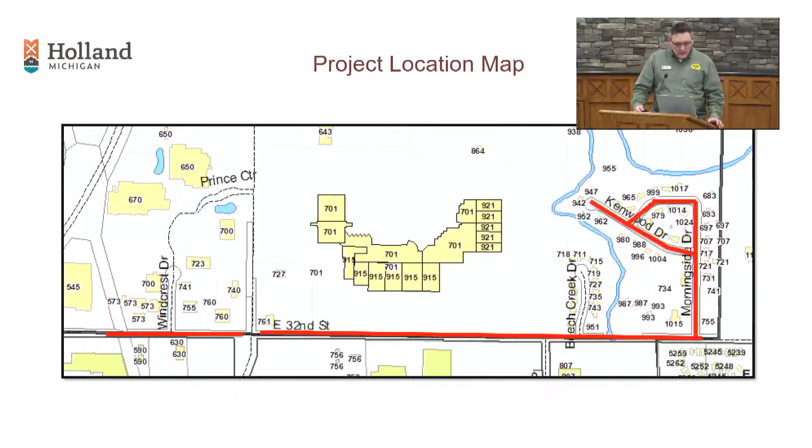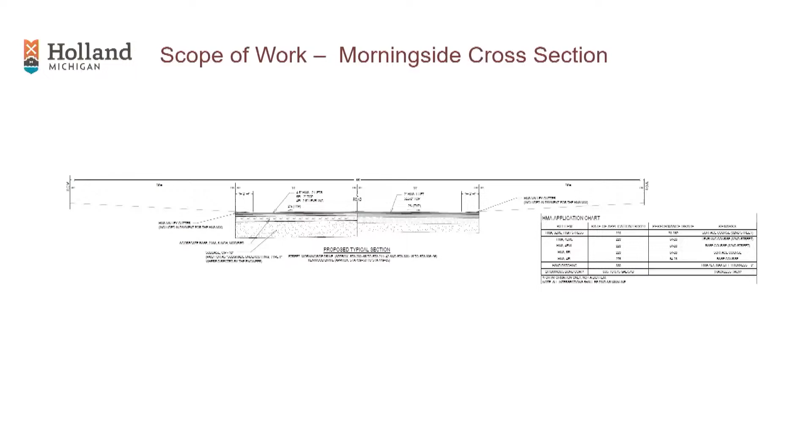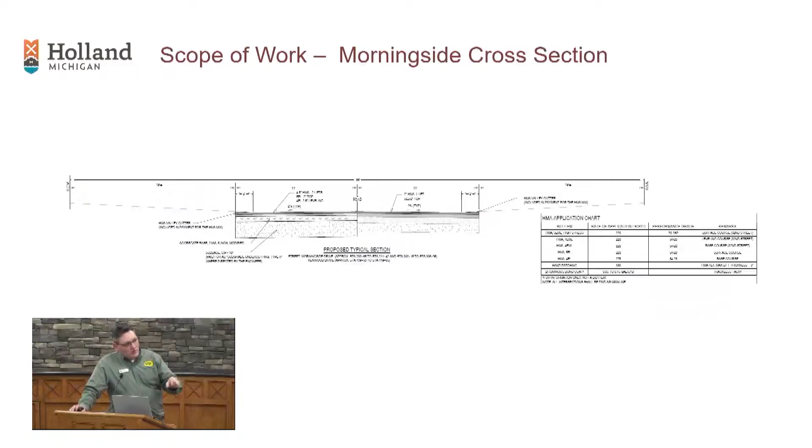So in Morningside and Kenwood neighborhood, what we're planning on doing is we will completely remove all the pavement on one side of the road, place the water main, get it tested, get folks connected to it, and then start rebuilding the pavement. That will include a new base coat and substrate on one side, and then we'll mill what's remaining on the other side and give it a complete new top coat of pavement as we leave.

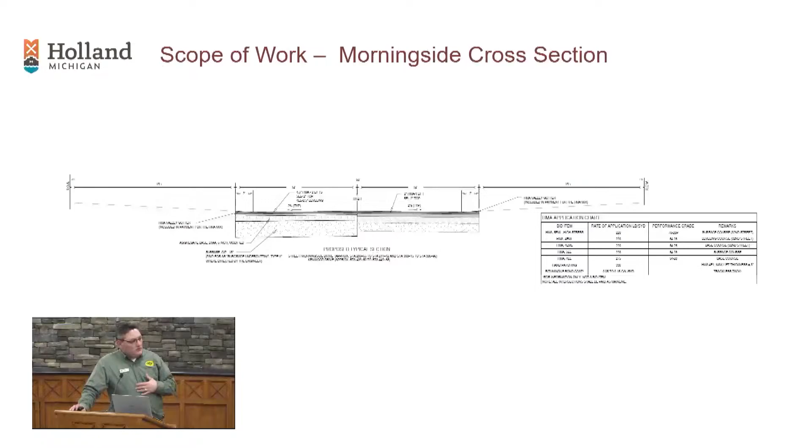So we're going to close all the westbound traffic and do a complete full pavement build on 32nd, and then the painful part will come at the end when we go for a full closure, mill and pave.

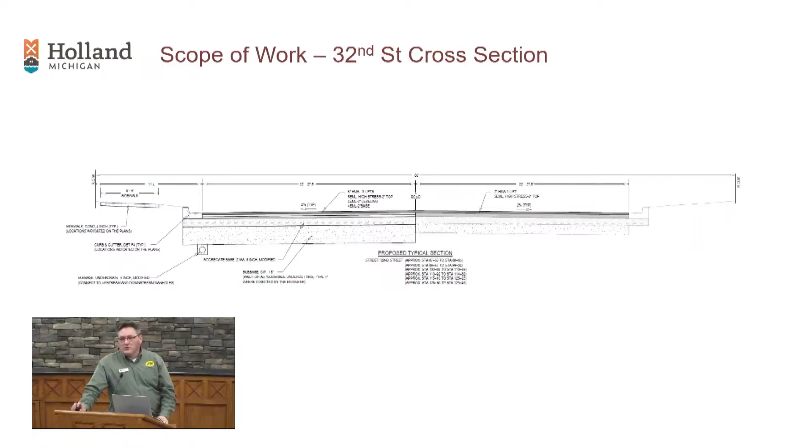I'll be sending some postcards with dates and expectations to everybody so that you can have some expectations about when things will go. We have some folks coming in, so please sign in so I can contact you guys in the future to let you know about what's going on.

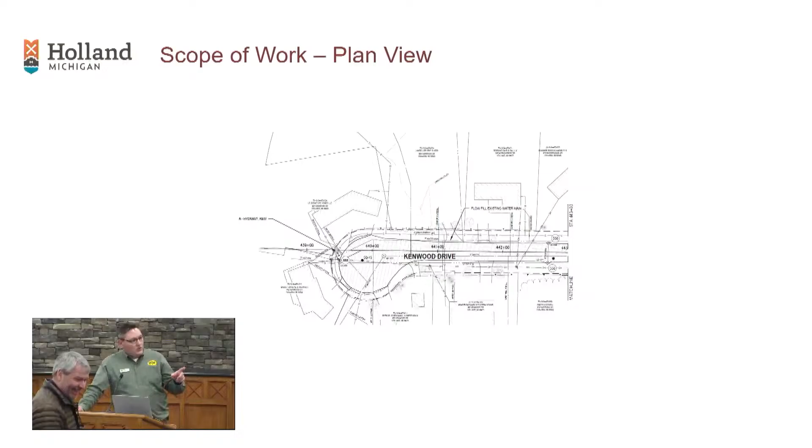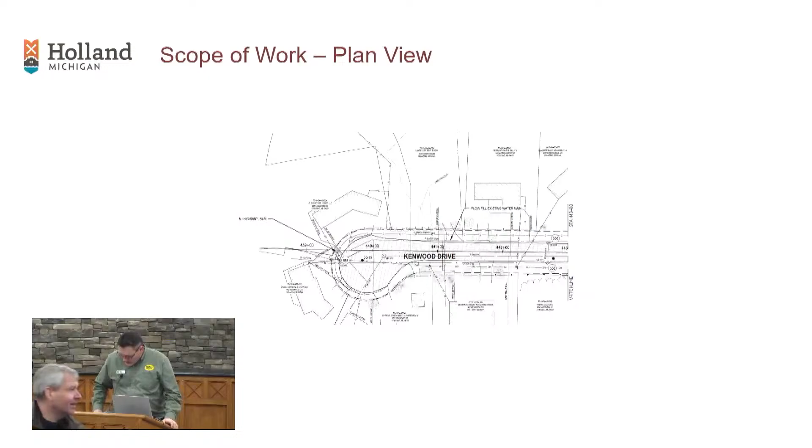Okay, scope. So we are looking at starting in the end of Kenwood, because looking at things with the contractor and timing, they are looking to start in early April. In the big scheme of things, that puts us having heavy construction during tulip time, and if I do that in 32nd, it'd probably be the end of me and most everything else. So we'll start the project in the neighborhood where the impact can be lower, and after tulip time, that opens the gates into 32nd. But just sequencing of work, we probably won't be churning into 32nd until mid-June, July, just depending on progress and timing.

It's hard to tell on this very small screenshot, but there are 2 different hatchings on the road. One shows where the water mains are, typically on the north and east side of Morningside and Kenwood, and that will be the pavement that we remove. We put the new water main in, and then the second hatching, the other half of the road, is where we mill and pave. We're not planning on changing pavement locations at all - it's just take out what's there and put back what we found.

So you're doing water, sanitary? The sanitary is an interesting vintage. The water is cast iron - the switch to ductile didn't come till a few years later. But the sanitary is PVC, and that's pretty much bulletproof so far. We haven't had any issues with the PVC sanitary in our entire system. That's original to the subdivision? Yes, it's a PVC truss, but it's PVC. So we are not planning any work on the sanitary - we'll touch on that in a second. We're not planning any rehab work on the sanitary, we'll just get some new castings, reset stuff, fix things up.

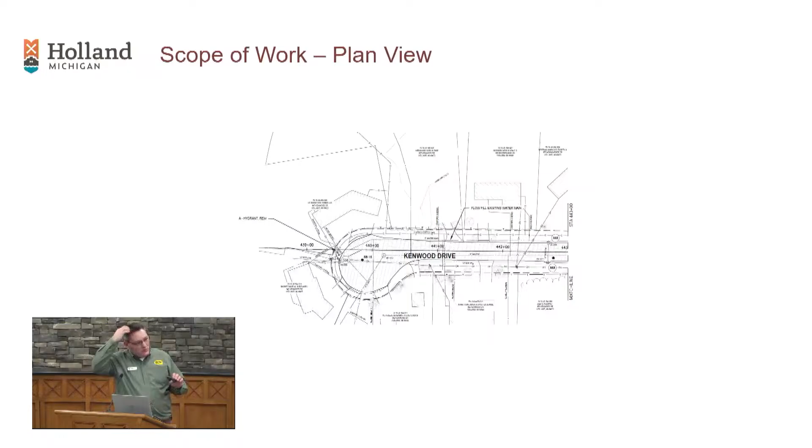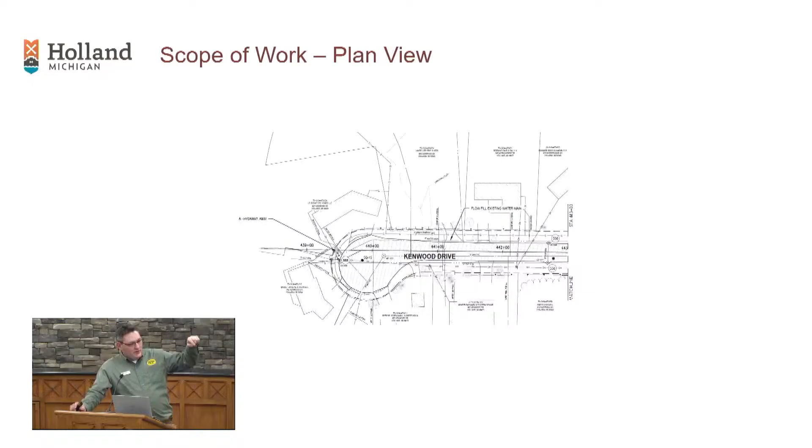So we'll start in Kenwood. Probably the one interesting change here is, as things were built in Kenwood, the hydrant ended up at the end of the block, and then the water main was extended out to the north to connect back up to 16th Street. This presents quite a headache with a telephone pole, power lines, a hydrant, and a further connection. So we're going to slide our hydrant over to the first lot line there, to the northeast, and just get it at the start of the cul-de-sac instead of at the very tip of the cul-de-sac. That's one change that will happen, but otherwise, all things, you guys probably won't notice the difference.

Water main's going to move over about 3 feet. Is that where the water main circulates? Yeah, so that connection was made to kind of give a back feed, and so that will be maintained - the new main will tie into that scope.

Just some more screenshots kind of showing how we're going to bend and place this main. If folks have individual questions on homes, feel free to reach out to me and we'll take a look at the plan set, how things go. But our intent on this is that the only thing that should change from your perspective is new pavement when we're done.

And so we're starting to get close to, YouTube's catching up, getting out into 32nd. This spot, as we turn from Morningside into 32nd, is the one spot that's really got me kind of twisting in the wind a little here.

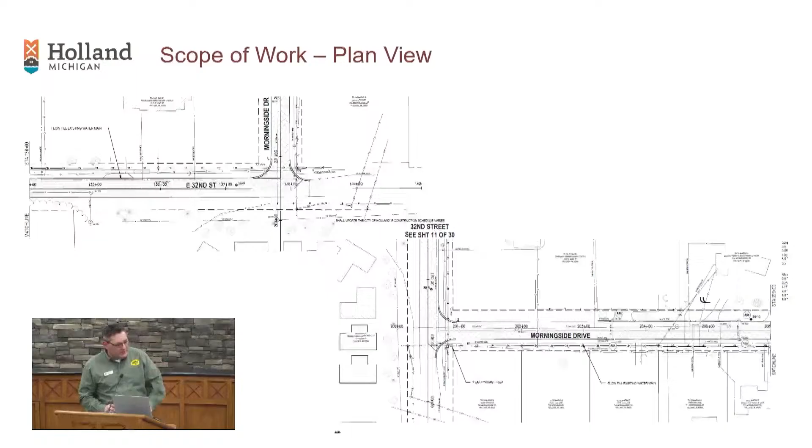The new road will stop at the city limit sign. I'm going to step away from the podium for just a second. This main right here is that little jog, that's where new development had taken off. So this main from about the valve here at the edge of city limits is 1990s vintage ductile iron, so I don't have any problems. That's the edge of my project.

I have a second mic to wander around the room. I promised I wasn't going to, but I already broke that promise.

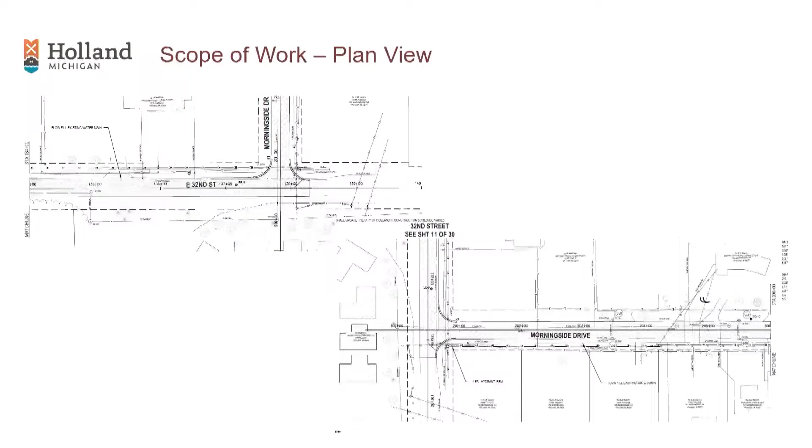The reason we're not going any farther than the city limit is really because the main is new on the east side of Morningside, so we don't have to replace it. So project limits, as we turn that corner, this is going to be one of our sticky points, getting through the 2-lane section. Thankfully, the crew that the contractor has understands the impacts of this road.

They did the first section just by chance - it was the same crew, same construction company that did the first section over by 31. So they understand the impacts of the road, and how there might be a few weeks when they're uncomfortable, but we got to squeeze through it and keep going.

Much the same thing as Morningside and Kenwood - we work in one half of the road, keep it going. A couple of interesting things that might come up on this plan set.

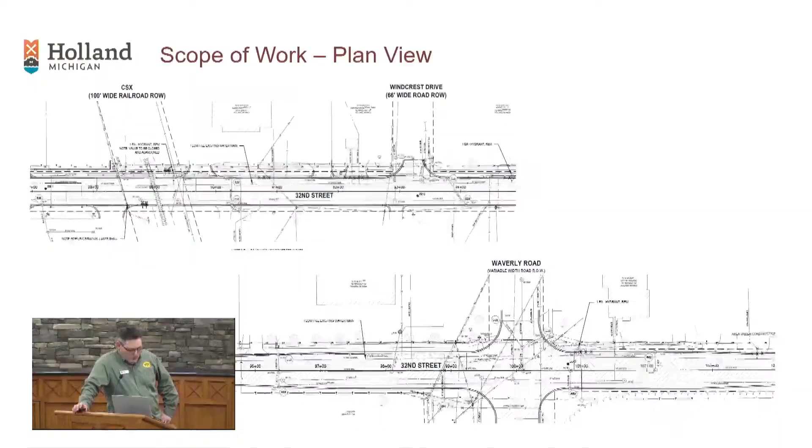There's a creek that passes through just west of Morningside, and there's a neat little bridge there. At that spot in the water main, and the spot up at the railroad, we're going to try structural water main lining. We hired the company that just did the Gaslight Village in East Grand Rapids with their water main lining, and we are going to line the water main in these two sections so that we do not have to excavate and go after this water main.

It's particularly painful in the creek crossing over by Morningside with that bridge. I think portions of that are 20 feet deep. They placed that underneath that bridge and culvert - it's safe there, but it's hard to get to. So we're going to line both of those portions. That's one of the fun technical things from my side that makes this interesting.

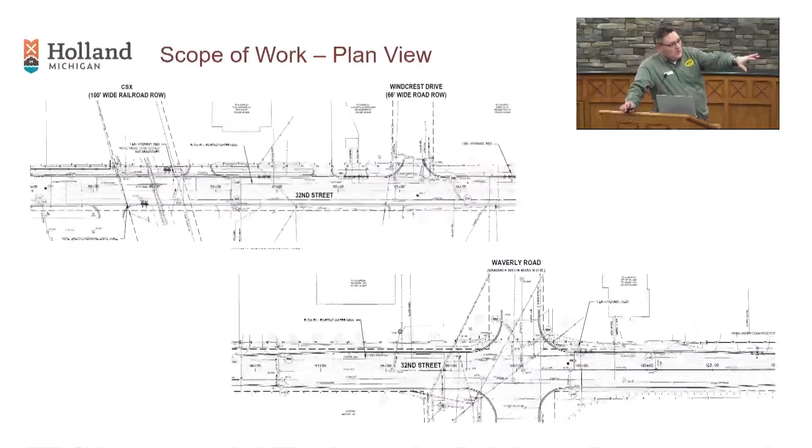So we continue to work up through 32nd. We're not planning anything in Waverly at this point. We were able to take out some of the valve work in there. That might happen a few years down the road, but for this project, it's not one of our concerns. Our last side of our project limits is technically just west of the railroad, where we take off from where we ended a few years ago.

Traffic flow, detours. Right now, what seems to be the smartest idea I can come up with, and I know I work for the government, is just to close westbound traffic.

We have tried this - it was my project on Waverly a few years ago when we tried to keep one lane each direction as we worked in a couple lanes on Waverly. It happened 5 or 6 times a day, we had people driving the wrong way down traffic. You think, oh, we got barrels and cones and stay here, but it caused so many problems that this time we're going to try just a one-way circulation of traffic out here.

So the westbound traffic, folks coming into the city, will be stopped at Morningside. It will detour you up around 24th. You can also take 40th and come back to the Waverly intersection.

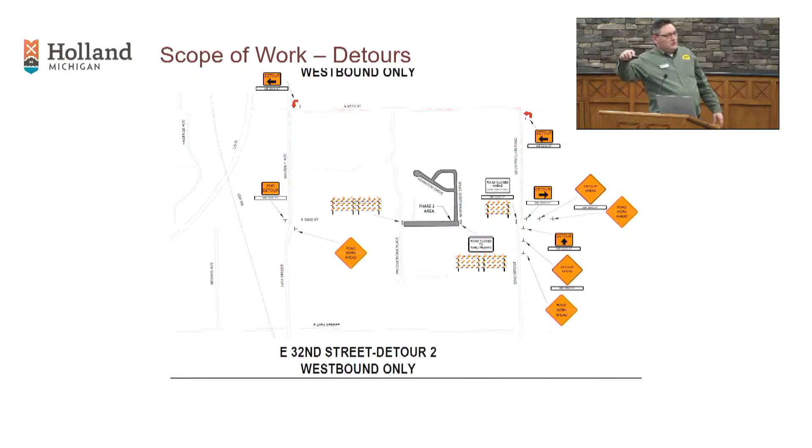Let's say that again. So you're going westbound on 32nd, coming down Country Club, it doesn't show up, and you come in towards Morningside, we're going to close the road at Morningside. Local residents can still come in and get through that way. But all the folks transiting farther west, we're going to tell them no, you've got to go around.

So we'll keep access into Morningside and the neighborhoods. Come back to Country Club Road, up to 24th Street. There's not a lot of connecting roads in here, and the connection through, is it Johnson Controls? That's actually private as far as I can tell.

So traffic control is going to be one of those pain points. Thankfully, with the way we're ordering the project, we probably only have to deal with this for a few months, where we've got only the westbound traffic closed. As we can, we're going to try to pull those barricades with us - if you get some main in, get it installed, let's get up into the wide section of 32nd and get a lot of this paved and moved on.

So go east from Waverly to Morningside - you don't have to come west. And I should note that's access to Morningside. There's another little subdivision in Productions Place and some other streets. They're going to have to come from Waverly and work their way eastbound. But we can slip a little bit of traffic around a barricade into Morningside.

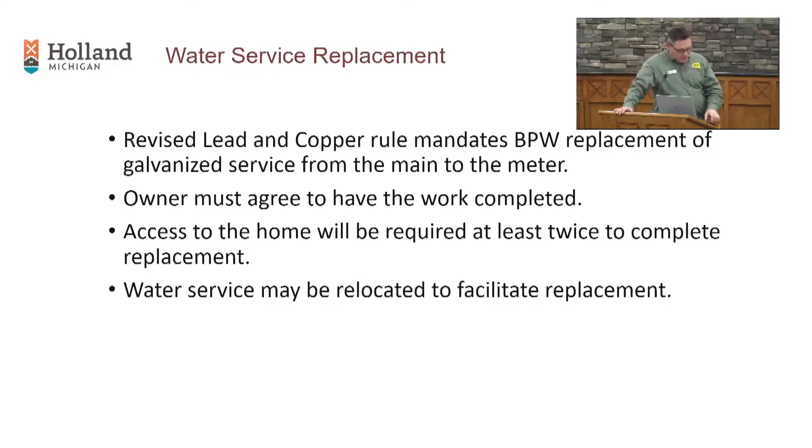It's a mandate from the state, free to the homeowner. They're trying to eliminate all the lead-containing parts in a water system. What it was on the galvanized steel was the way they tapped the main.

Now it's all brass, and we cut this thing into the main. That connection done before was lead pewter, so it contained lead, and it falls underneath this rule. So that's gonna go away - yes, the line and new connections, all that goes away in this project.

But we tend to talk with the homeowner, say, hey, we're going to drill in right next to it. Guy cuts a little hole, they nail it, bring the copper line in, they put it back. It's really no different than if you called a professional plumber and said, hey, I want this done. Same work method, same process - I'm just paying the bill instead of the homeowner.

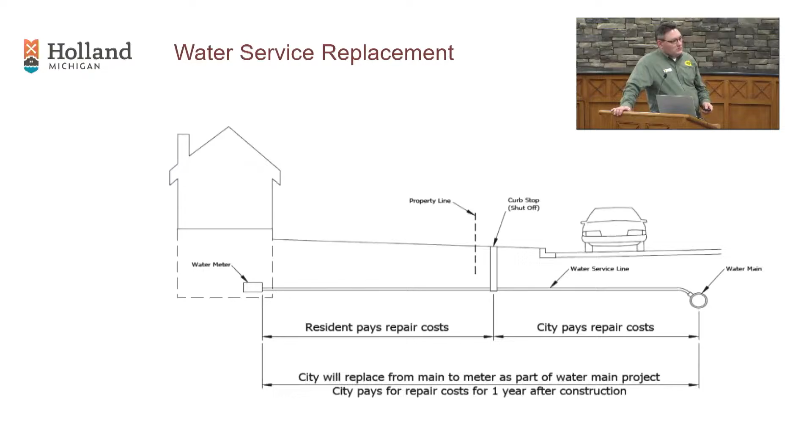I'm currently doing this on 18th Street because we had pretty decent records there. So far we've had really good luck just yanking some of the pipe right out, or being able to pick a galvanized, a drill to get that galvanized steel out of there. I want to say we're up to about 800 homes that we've done since 2018. The first few years were a little rough - we had to learn a lot, and now it's smoothed out quite a bit. So yeah, that's the water service replacement.

At what point does it stop at the house, at the meter? So what we do is meter - we'll come through the wall, set a meter, and then the plumber is to connect the house back. So if he moves over 3 feet to get a new spot for the meter, he's going to connect the meter back to the house.

So the homeowner doesn't have to do anything to prepare for us, doesn't have to do anything - you just be without water. When they drill that in, I've been as short as 15 minutes without water, because they get everything set up and then shut your water, and it's a professional plumber, not me, so they can move a lot quicker.

Do you use the same meter? No, we're not - we're using this opportunity to try to get in, get everything done we can, and not come back and bother you folks.

We had water main work done from the house, and then it backed up sand into our hot water tank and ruined that. How do we prevent that?

So sometimes it's sand. The galvanized did not have the lead content, but what the galvanized did do is collect the hardness of the water, scale. I usually have some fun stuff for show and tell, but a lot of the old galvanized pipe you can find has been necked down to the size of pencil tips.

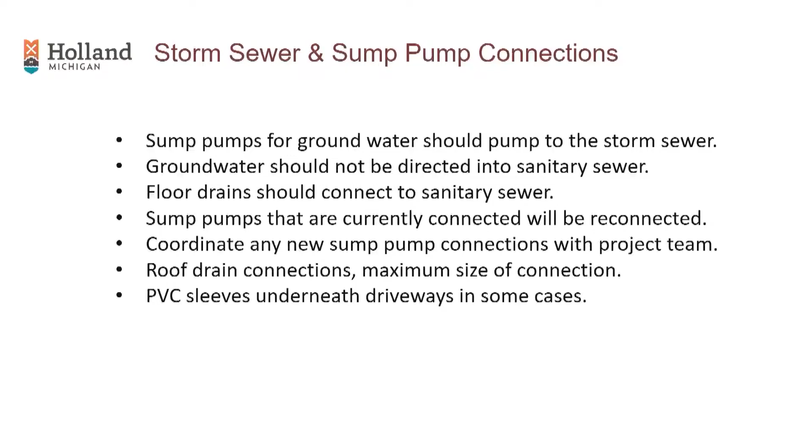You get water main breaks, and we flush, and we directionally flush. When we get into this, a lot of that should go away. We're going to get new main that's clean and scale free. We do construction techniques to get a high velocity flush in there and scour out the main, so a lot of those issues should go away.

We still replace the hot water heater if it happens. I do fix everything I break. I try very hard to not have that happen.

So I think the last question is what we've told the professional plumbers: they set the new meter and the new meter horn, then place copper to connect the house. They do have to get into the house, yes, so they'll be in the basement for a few hours. The other interruption you'll see on water is when we do complete water main shutdowns to tie water mains together.

I try to target either after breakfast or after lunch. I give the contractor a pick. Sometimes we'll do one end and then the other, and we try to use valving to limit as many people as possible so that doesn't become an issue.

When that happens, what I do is get a white or orange door hanger and write the time on it the day before, and hang them on your front door saying, hey, we're going to shut off tomorrow at 9am—usually it's 9am or 1pm. Then we stand there with a watch and don't shut off until 9am sharp, and then try to get going after it, try to get them set up so that it's off for as short as possible.

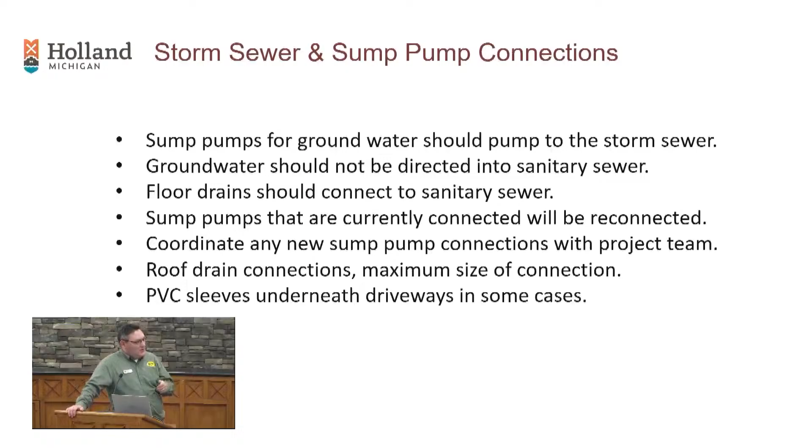So if you do need that, please let me know. Some expectations you can have of me during construction.

Mail service continues as normal—they like to pretend we don't exist, and we like to pretend they don't exist. So that should continue as normal.

I'm not aware of any tree removals planned at this point, but if we do, we've always done it through a tree survey to make sure it's absolutely necessary. We don't have any planned right now.

We talked about the utility service interruption, and then night paving is possible. We haven't gotten confirmation back, but that'd be full paving only on 32nd. We'd be looking at doing a full tandem top course to eliminate pavement seams. On Morningside and Kenwood, we think we'll do one side and try to do the same on the other side the same day, but you'd have base courses and a lot of that.

We'll send you some mailers or door hangers and all that to let you know. Trash pickup—probably my most frustrating day on the job.

I had not planned for trash pickup to be a problem, but it's amazing. One trash truck gets stuck on your job and burns up, nobody wants to drive on it anymore. And they refused to enter the job site, so we had to collect all the trash cans and bring them out.

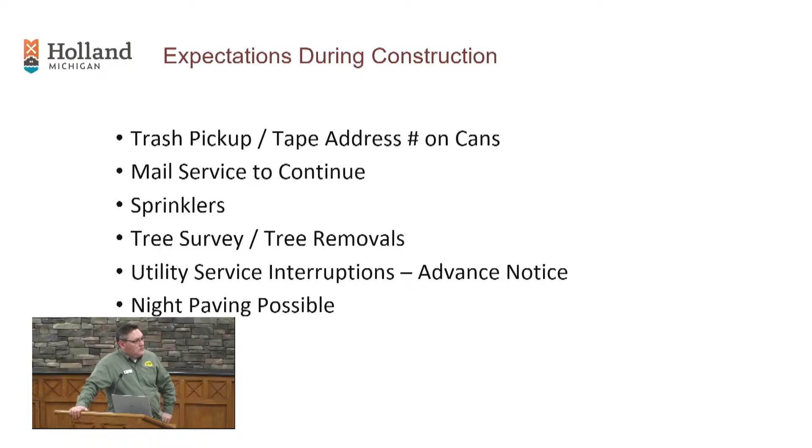So that's sprinklers and mail service.

The project did actually close on bid. It is Skipper's Construction. They just finished the 28th Street project over by the high school, and they are working just fine there. And I'm told they've promised me the same crew that did the project already on 32nd, so they should have seen that work and do this fine.

So we're to the Q&A section here. Is there any other questions that are out there?

Yeah, there was a question about schedule. Part of this was we were going back and forth because when we first wrote this, it was debated whether it was a full season of work. The contractor said he thinks it is. I was thinking we were about two-thirds to three-quarters of a season. It kind of depends on pipe production, weather, and getting everything together. So they indicated they want to start as early as they can, which is May. That puts them May to July on 32nd, and then probably July.

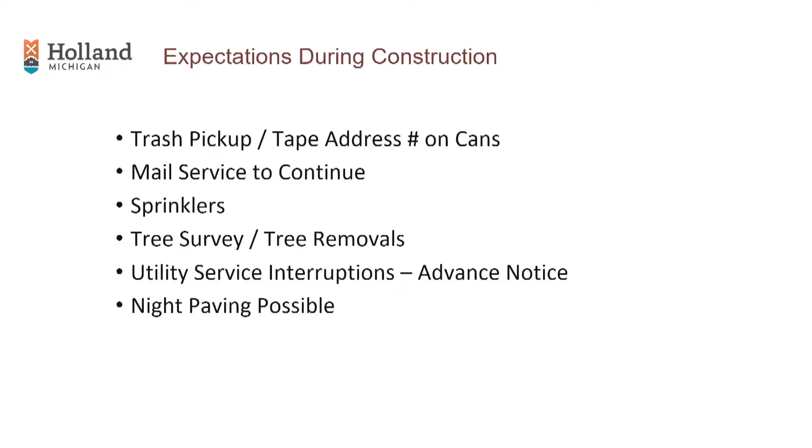So yeah, driveway, we brushed over that. Expectations, driveways, we didn't talk about it. Especially with just one underground utility, we expect you to have daily access to your home, and 90% of the time that's going to just continue uninterrupted.

They're probably going to average 300 to 400 feet a day of pipe production. So if they start in the cul-de-sac, they might get to the intersection one day, then come around the corner the next day and get to the next intersection. So you'll see them coming. There will be times when they're building pipe right in front of your driveway and you can't get in and out, and they tend to just knock on doors and tell people, hey, we're coming. But the rest of the time, we expect you to have access to your home.

They build gravel ramps back behind them as they continue through. Same thing for that Morningside intersection - we're going to keep at least one lane open through the intersection at all times, so there won't be any time that you absolutely cannot get in or out.

Emergency services too. And I want to say that new firehouse is going to get commissioned in like 3 months. The new firehouse there at Waverly - I'm hoping so. They were just calling me for new water meters, so they're getting the plumbing done. Yeah, you're getting close.

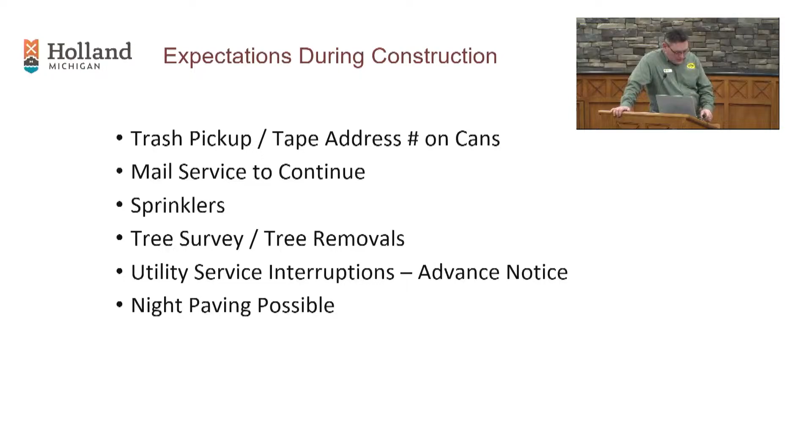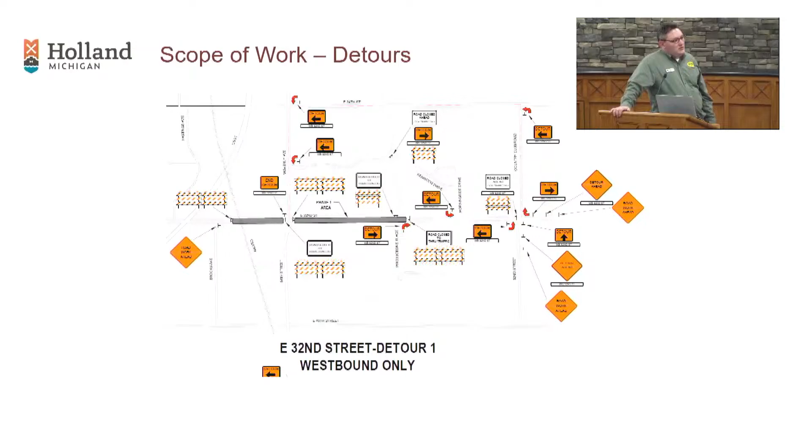I just really hope there's some good thought given to traffic control. We haven't finalized traffic control plans. Part of that thought process was just not getting you into the oncoming lanes, but with enough barrels I could probably let you guys have a westbound movement through this. A good portion of 32nd is going to be 4 lanes wide, and really I only need 1 lane to get people moving in one direction. We could revisit that if we wanted to try to get 1 lane each direction, but on just one side of the road.

The 2 biggest battles I have to fight are getting you back to the light at Waverly - which shouldn't be too much of a hassle, but you need to be under the correct light, facing the right way at Waverly - and making sure it's clearly labeled, like, hey, this lane of traffic is getting cut down to 1 lane.

So we could revisit that. The majority of people from Morningside, if they go east, are mostly going to be turning north on Country Club. So maybe I keep a local westbound lane and divert everybody away from the job site. People are gonna cheat, but...

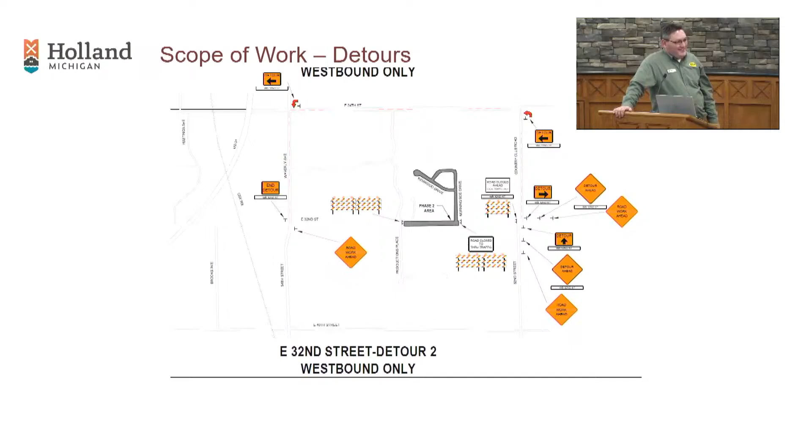You put a lemonade stand out? If we put donuts, will they speed up the whole project a little? They'll slow them down, though—more break time to eat all the donuts.

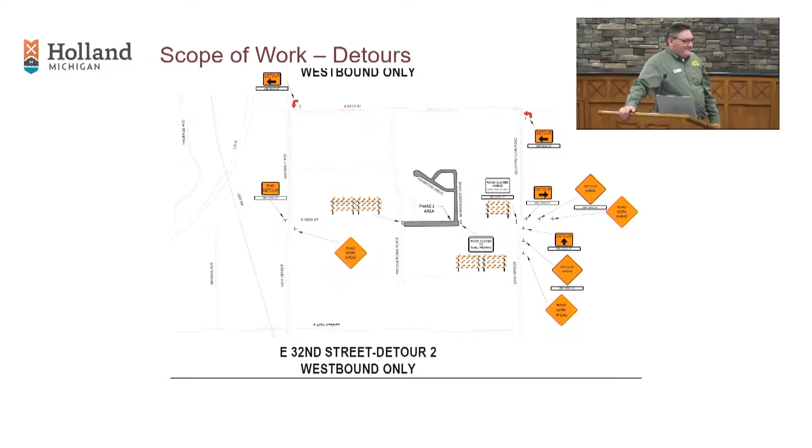One question on paving—if they're done, they're going to start at the cul-de-sac, the bottom of Kenwood Drive. And phase 2 is 32nd Street, correct? Yes. So once phase 1 is completed, would that be paved, or are you going to do the paving as one thing? Different crews do the work.

The rule we keep with them is if somebody's restoring, you can keep making money by laying more new water main. So probably what you'll see is phase 1 get torn up, the new main put in and installed, and they'll have someone starting to gravel in, building road and getting everything set up, while we start tearing up 32nd and getting into it as the rest of Morningside gets paved. We let them keep working as long as they're still restoring—you just can't open it all up. But there is an overlap of work sequence, and we're aware of that.

So if you're paving this section, you can keep working on some, because it's two different crews and two different work styles. It's a two-phase project.

When you put the pavement down, you put this underlayment or rough course down first, and then the top layer over the top. Yeah, and this is kind of—you see it especially in 32nd.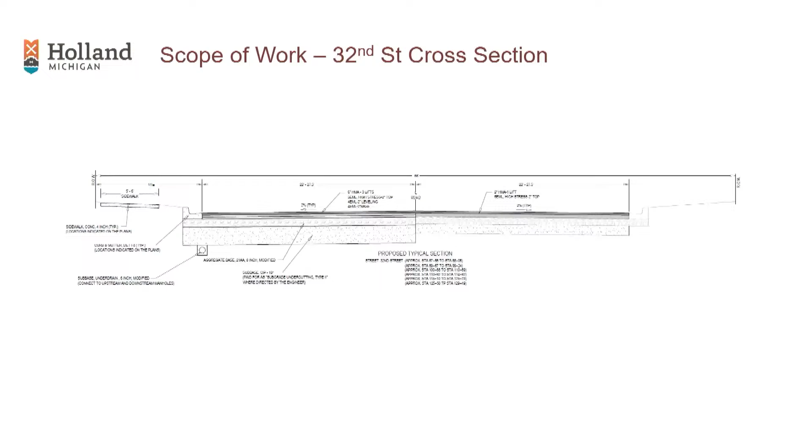Are you going to do both sides of the road on 32nd? We'll pave both sides, but only where I'm digging the big holes are we going to build a thick cross section of pavement. If you start on the west end of Kenwood, which is the cul-de-sac—

Are you going to come straight to Morningside or go around that jog? Do you have any idea? Probably what you'll see is that full pavement gets taken out all the way to 32nd in one day, one lane. We'll open up one lane, then open the access, and then they'll come back and probably keep some of the millings and build in the driveway ramps to get you over that milled out pavement.

How about the drain—can you work on the drain? Not at this point. You're talking about the Maplewood Intercounty Drain? That's the river, it's a county drain. Yeah, the one by your house.

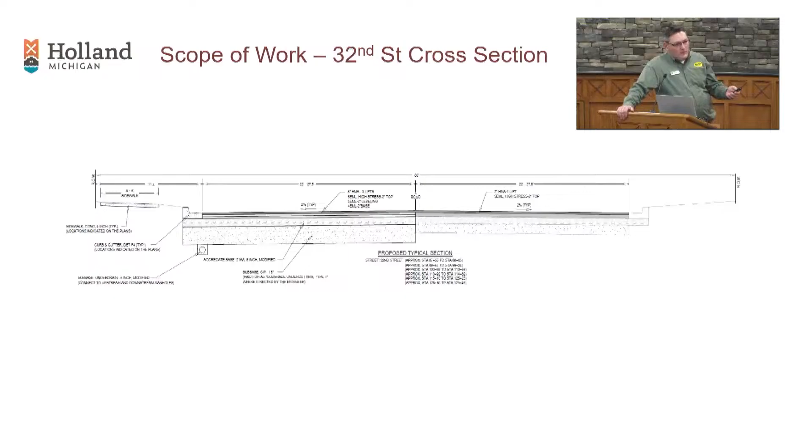It was under the road right there by you, by the park—talking about the creek that runs beside us? Yeah. So we are not improving any of the county drain, just a big culvert under the road. Great, okay.

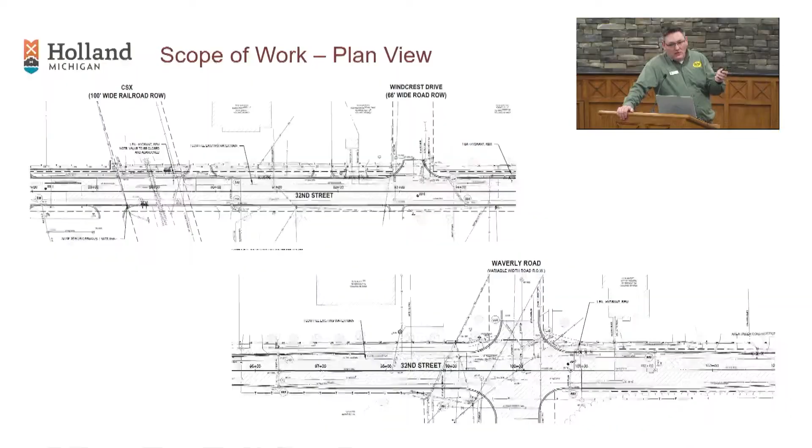In 32nd, we're going to line that portion of the main—we're not even going to dig it up. And in Morningside, we'll just get our main put in through it.